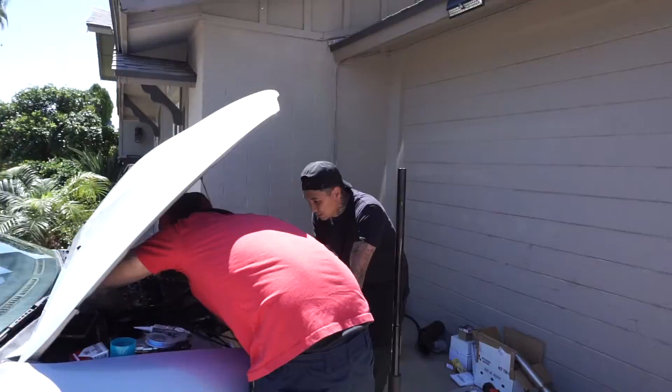Alrighty guys, we showed up. Got the boys working here. What up, what up, Kevin Triple G.

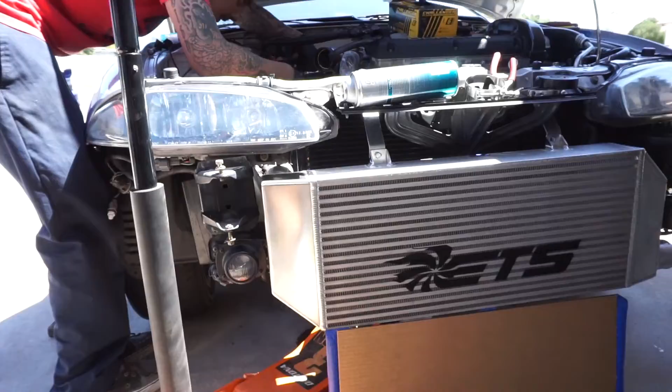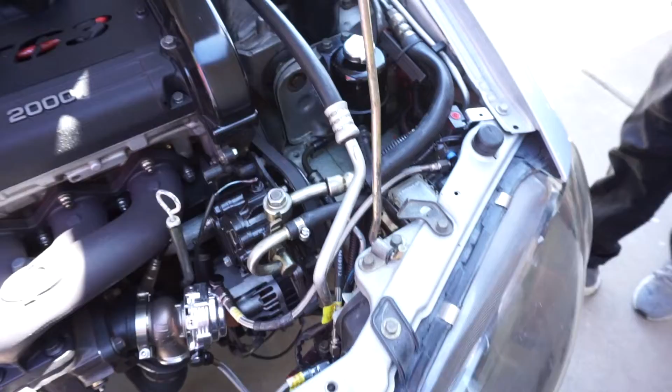Alright bro, let me see your intercooler. Check out the mean intercooler you got, damn, hella clean. He's also doing an electronic boost controller, so here's his solenoid. He did all the steel braided lines for the wastegate, and right now they're throwing on some couplers for the intercooler piping.

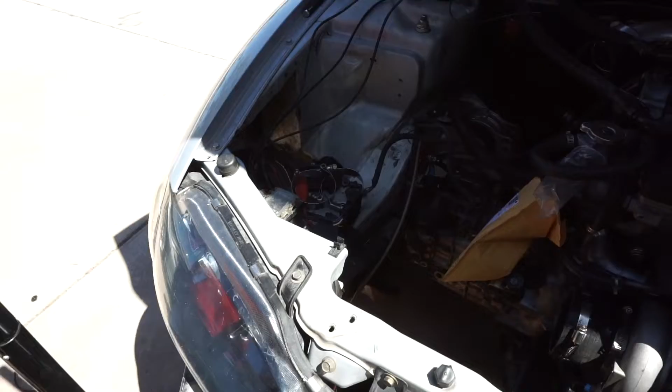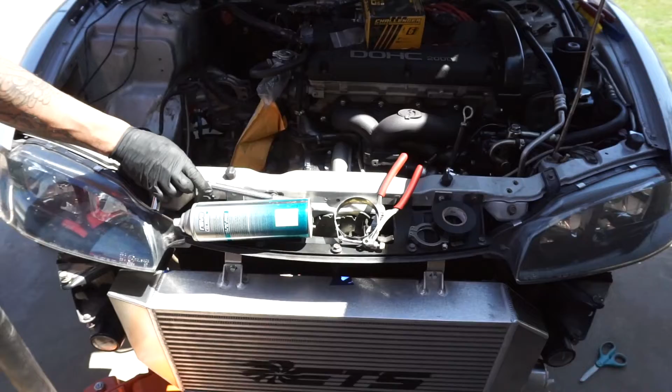And you're also doing your flex fuel, it's gonna go all the way down here. He's gonna be doing flex fuel and all that stuff because he's trying to also get tuned on Tuesday. 700 horsepower coming soon, and then a sick intercooler pipe.

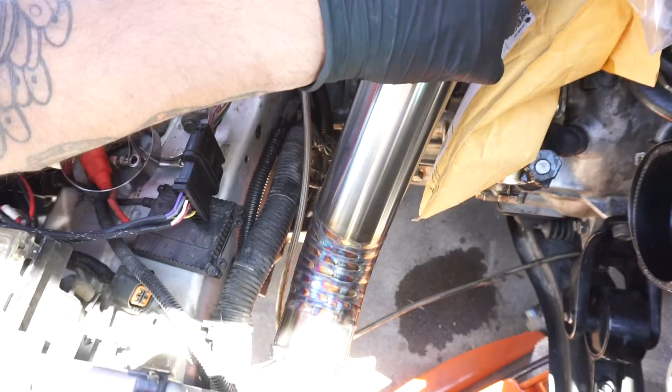Fresh boy, oh yeah, it's perfect, yeah. Money. How much have you spent, bro, so far? Don't even know man, don't even ask.

Alrighty guys, so I left my buddy's house where we were just chilling and talking. I didn't record much, just that little clip you saw. But I'm currently on my way to the tuner's house, almost at his place, I'll catch you guys when I'm there.

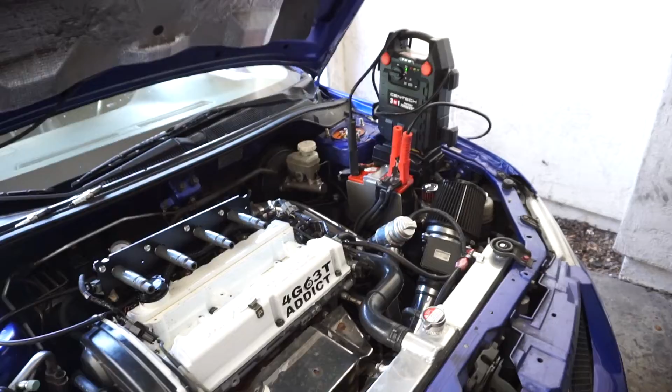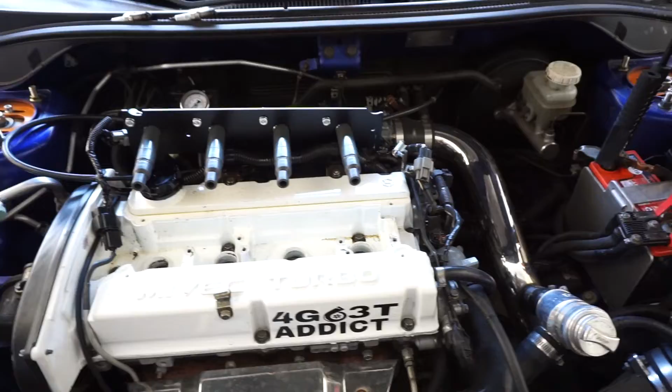Alrighty, so we pulled up to Anthony's crib. Big shout out, man, what's up, helping me out, hooking it up. So he's checking everything, went ahead and checked my pistons, making sure everything's good for the day of the tune so everything flows right. Right now he's loading my tune to make sure everything's set up, it probably doesn't look right yet, but he's gonna work his magic and hook it up.

Alrighty guys, what is going on, it's currently a week since I was at my tuner's house. Today is official tune day, so I'm at the gas station. I'm gonna go ahead and pick up some E85, E85 is what we have here in Arizona, so we can start the tune at his house.

So yeah guys, I'm right here, gonna throw some E85 in the jug, and then we'll be heading to his house. Man, I'm excited and nervous at the same time, always get nervous with these things, but it has to be done and I want to see this thing make some power. I'm gonna go do that real quick and catch you guys in a little bit.

Alrighty guys, got my juggy right here, filled up with some E85. That's just to get us started, then we'll make it to a gas station so we can fill her up, but this should get us going for now. Well, here we go. Wish me luck guys, I'll be there in a little bit, I'll see you guys when I pull up.

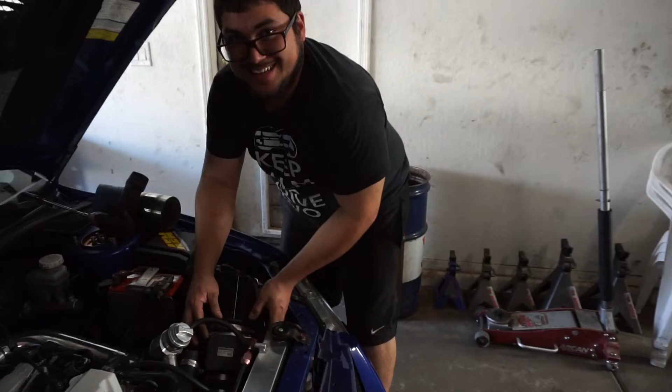So I've made it to my destination. What's up bro, here's the man himself. Him and Mr. J.A. Tuner are gonna give it the sauce so it finally runs good.

Right now we're gonna go ahead and switch out my injectors. We're gonna take off and do a speed density intake, so he's pulling off my intake and we're gonna use that one. You're at a 3-inch intake now and your turbo's a 4-inch inlet, so this will give it all the air now. So we're gonna do that, change the injectors, and I'll keep you guys posted.

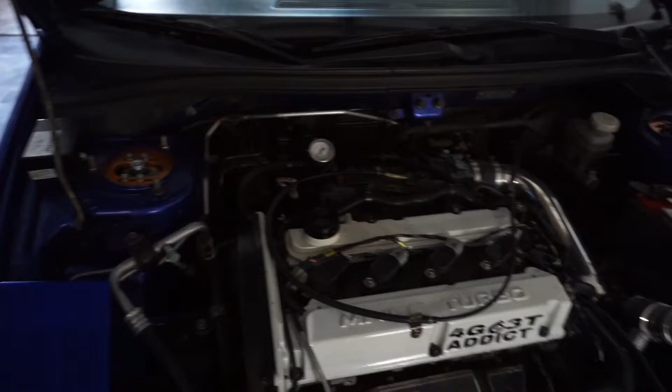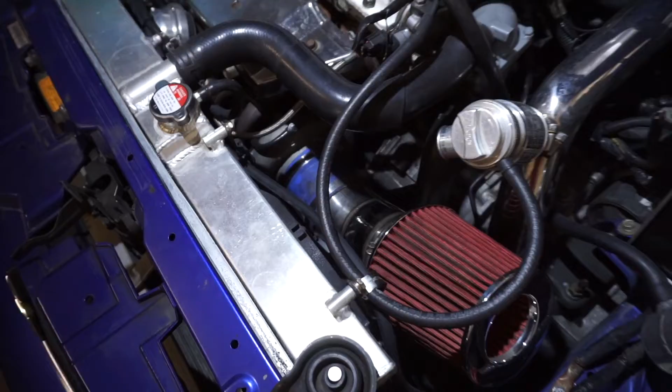Alrighty, see if you guys can hear me. New injectors are in, the intake's on, we got the blow-off valve vented. So right now we're gonna go ahead and set my TPS so we'll be ready to tip. We're gonna do that real quick, and then I'll catch you guys when we're on the road.

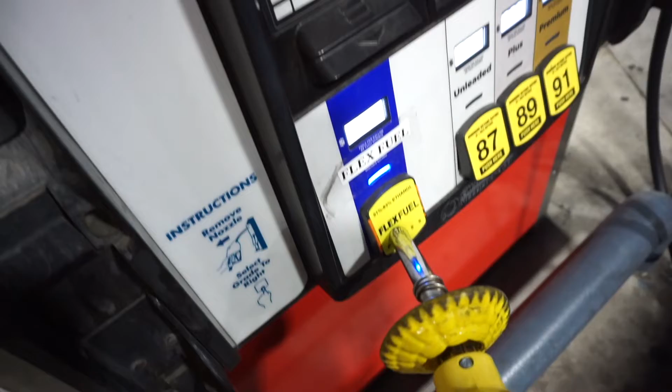Alright guys, this is the first fill up on this, kind of on E, so still getting everything dialed in. Here we go, let's do this. I'm excited guys.

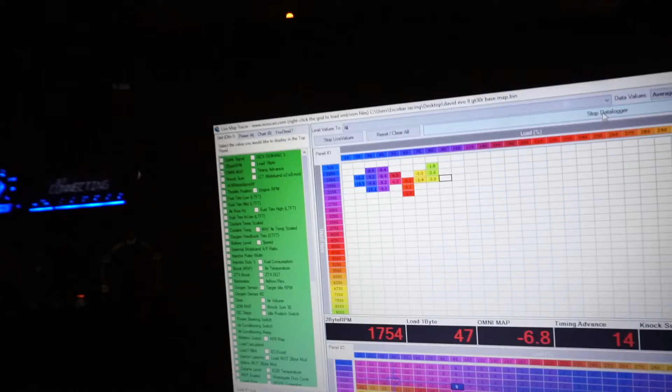Alright guys, a little bit more boost. We were on 15 pounds at the last pull. We're gonna see what it does now.

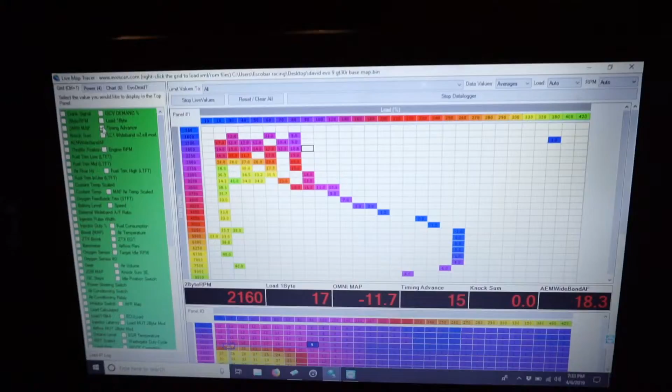On scale up to 11.3, 11.4 to redline. We're doing this till we get it pretty close, engaged, then we'll go to third gear once we get second gear. Alright guys, down, another second gear pull.

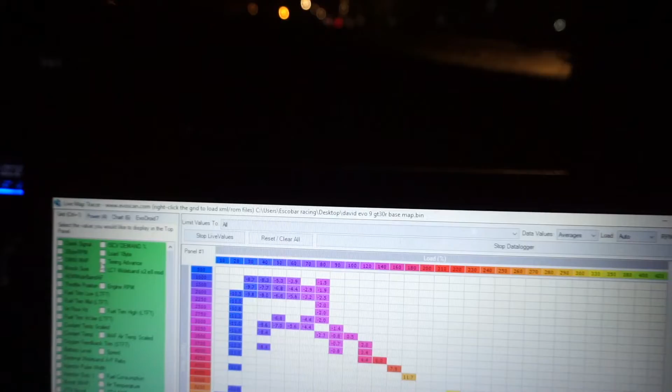Number 4. That one felt a lot stronger. Yeah, that's a little bit of timing and a little more boost.

Number 5. That was 29 pounds.

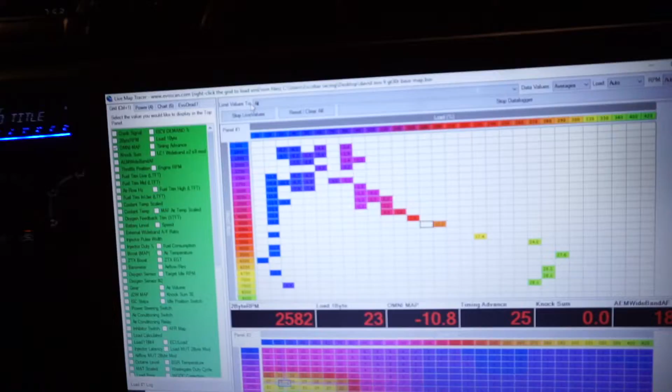Stop on boost. Alright guys, so now we're gonna do our first third gear pull. We've been doing second gear pulls, so now it's our third gear pull.

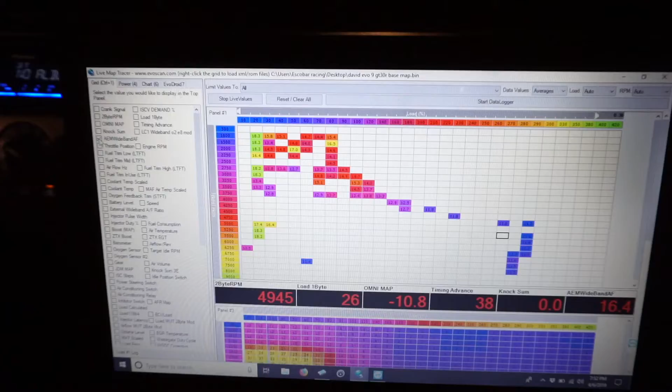Definitely pulls way harder than what it was. Now you got real fuel in it. Yeah bro, that's still low timing. Like I said, we just work our way up with boost.

Alright, here we go guys, another third gear pull. Second, third gear pull. This shit feels good though. I tell you guys, it feels way better than what it was.

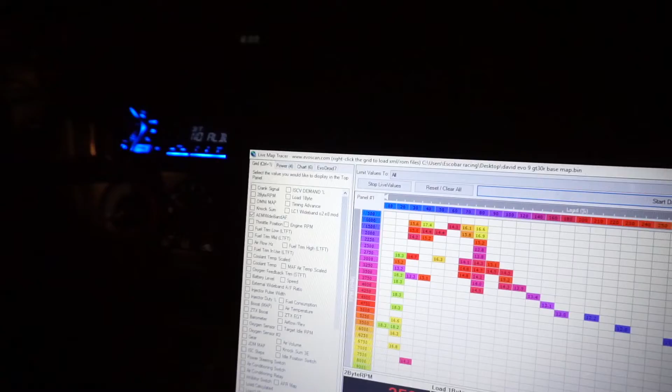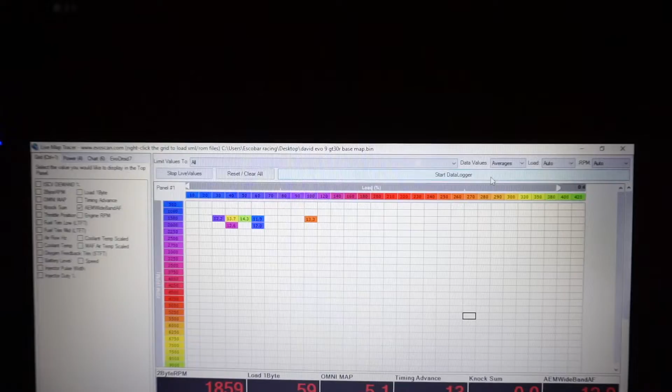He's convincing me to go with cams and valve springs. With cams and valve springs, we'll gain another 1,000 RPM in the rev limiter, and we can run more boost since it won't valve float since it's not gonna have stock valve springs. So I think that's what's gonna be next - get some cams, some valve springs, get a better clutch, and what else.

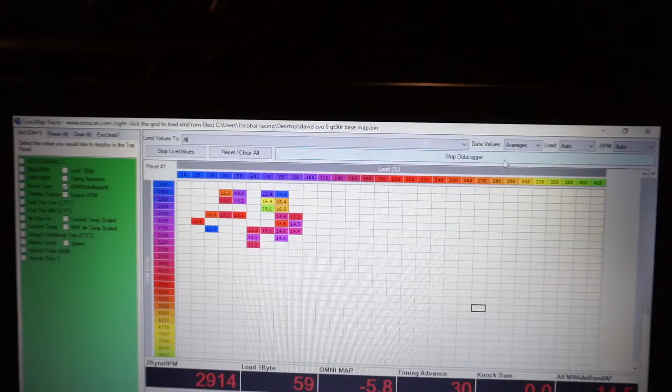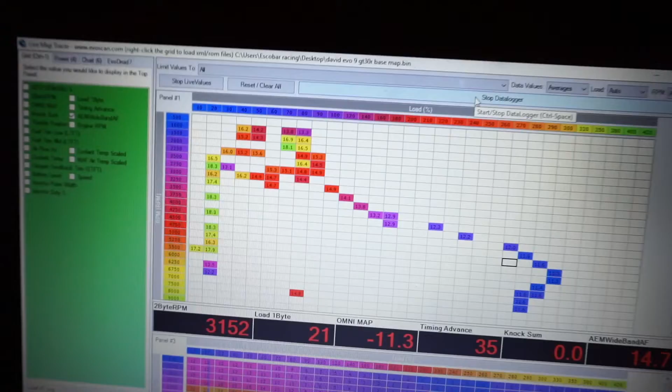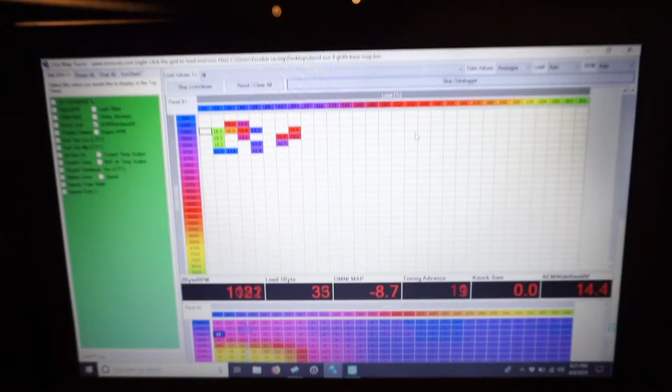It's just the third gear pull. Now we're gonna do a second and third.

And we're gonna test no lift shift since he doesn't know about that yet. He's gonna test the no lift shift.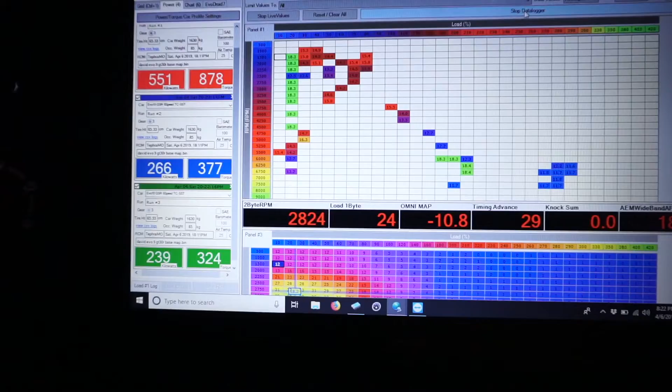Shit's sick bro, damn. I don't know if you noticed before, like when you shift it'd kind of jerk between gears. Oh yeah, you have to let out. Now you don't - it'll hold boost between gears better and it'll let you shift faster. Shit's sick. Only thing is, like you said, you're gonna have to upgrade your clutch.

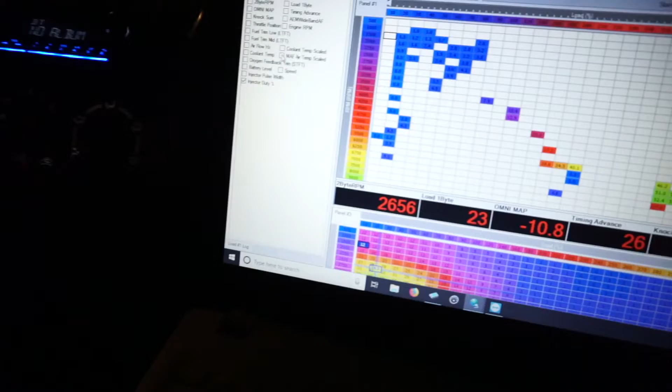So now we're checking launch control. Let's hear it. Nah bro, it's loud though.

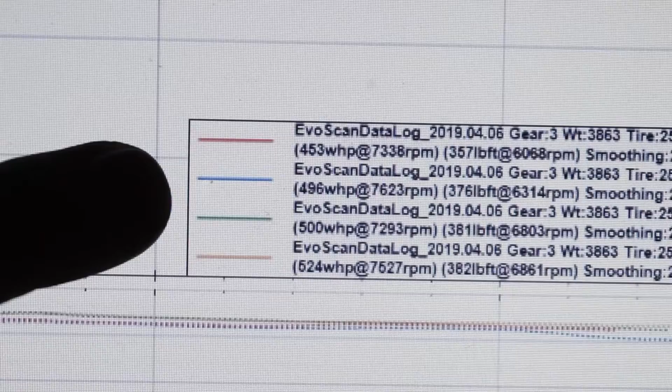There we go. Alright guys, so these are some numbers. He's gonna explain to us real quick what it is. So when we start doing third gear pulls, we start saving the logs and doing power pulls.

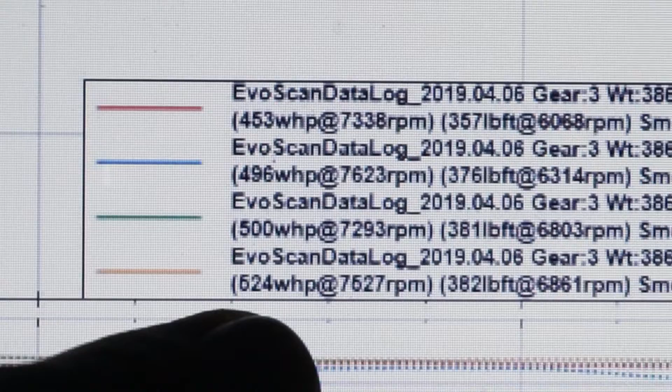This was where we started on our first third gear pull, and this is where we ended. So it goes in order of the pulls we did. We ended at 524 horsepower and 382 foot-pounds of torque, I think. I couldn't be happier. That's fucking sick, it feels fucking good.

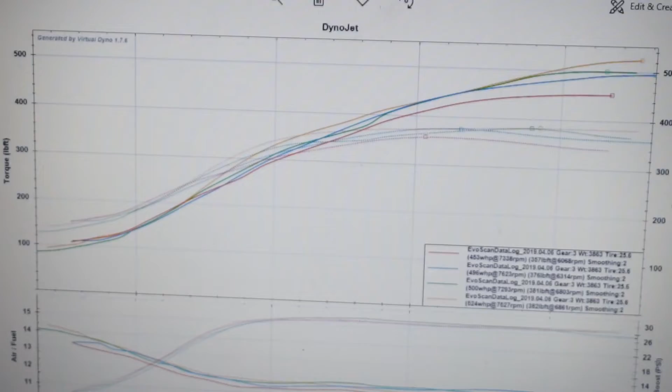Look at the AFR curve, how flat it is. Is it this one? Flat. This is the AFR curve here. And then your boost curve, super flat too. So that's pretty good. Hell yeah.

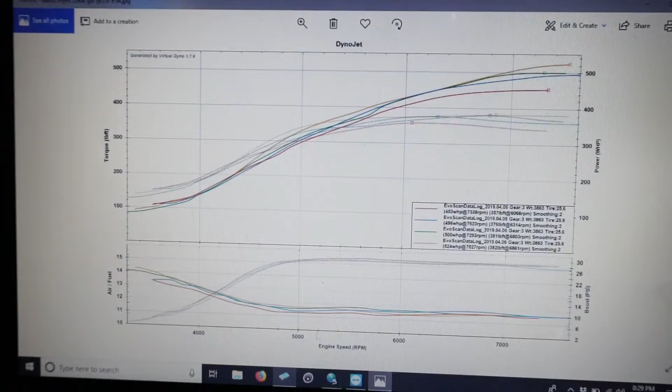He was playing with me and told me I only made 460, and I was like, shit. I was bullshitting him, I'm like no way. And then he pulls this up, so fuck yeah, I'm excited. Big shout out.

Alright guys, it is currently the next day. Yesterday when I got home after the tune, my camera died, so I just got home and called it a night. But yeah guys, the Evo made it home safe.

She's good and she's running hella strong. I'm really happy with the results of what she made. It was 524 horsepower and 382 torque, I believe.

I want to give a big thanks to jatuned for giving the Evo the sauce. It's like a complete different car. This morning I went to the store and it's just a complete different car, like it feels nothing like it was. And the E does make a big difference, it just drives awesome.

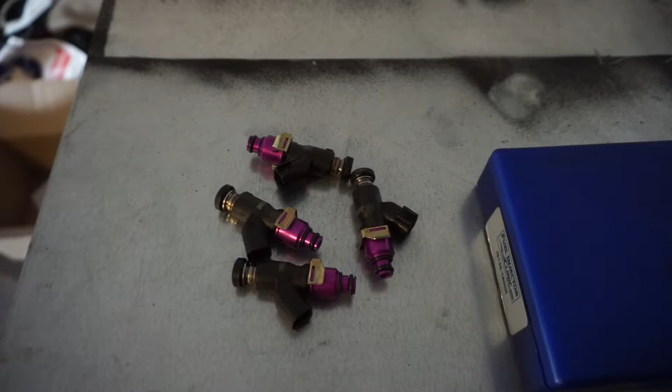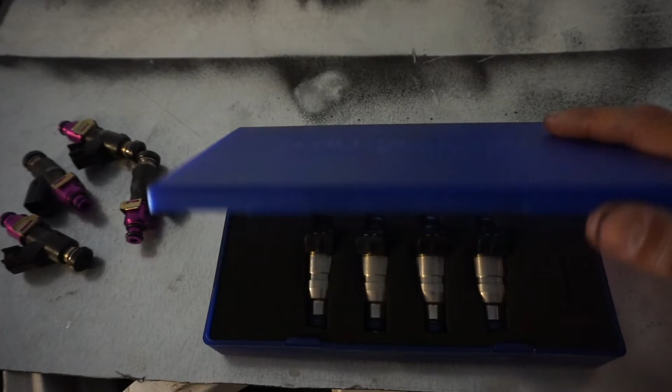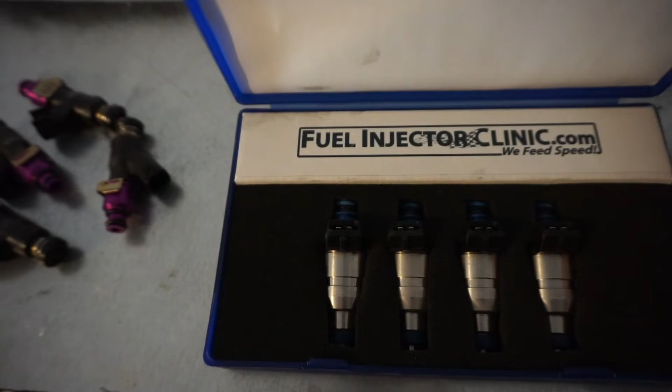Alright guys, this is what I wanted to show you. So as you know, I was on these 1000cc injectors that I broke my car in with, and when I was gonna get tuned, I was gonna switch to these 1800s I purchased from Map Performance. These are 1800 low impedance injectors, so the whole plan was to switch from these to these for the tune. When we decided to switch to these injectors, brand new straight out the box, I slapped them on and the car started misfiring. So we're like, well, what the heck? We started going through everything.

We started checking plugs, checking spark, making sure my coils were firing right. We checked to make sure the plug to my injector was getting power and all that stuff, and it turned out to be a faulty injector. One injector was not working, not spraying, and it was causing my car to misfire. That really sucks because these are brand new, I purchased them literally straight from the box onto my car and they didn't work. So I'm gonna contact them and see what they can do for me. But we ended up figuring it out, we got another set of injectors and made it work. That really sucks, but like I was telling you guys, the car runs awesome.

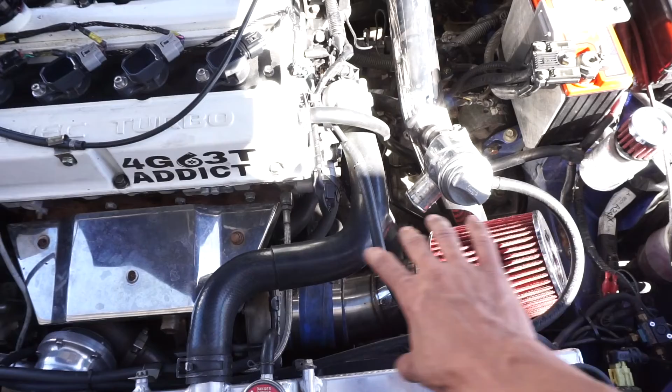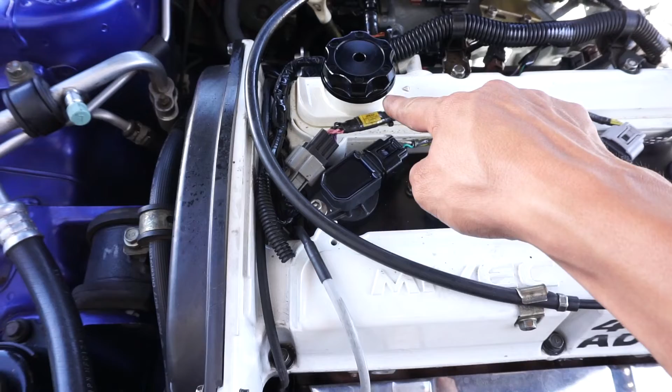Let me show you some of the things we changed. I no longer have my MAF, now I have an intake. My blow-off valve is vented to the air. We have the whole speed density sensor now, and that's pretty much it. Just no more MAF, you no longer have the big old MAF right here, and my blow-off valve is vented. So that's pretty cool. And we're on E now. Also had to change the seal on my oil cap because every time it goes into boost it's spraying. So yeah guys, I'm happy with the turnout and the results, and that's all that matters. I'm just gonna go clean up my bay a little bit, clean up the wiring on the engine bay and the Evo, and then we should be good.

That's gonna be the end for this video guys. Hopefully you enjoyed the little clips of the pulls that I got. I didn't get to record too much because we were just trying to get the injectors to work and this and that, but hopefully you guys enjoyed it.

Stay tuned for the video for the DSM coming out shortly. Also, parts are starting to stack up for this 2G we have outside. Pistons are here, so now we can get rolling. Stay tuned for that, guys. We have a bunch of stuff coming up with my 1G, the 2G that's outside, and this 2G that needs to be finished. I have another Evo that I have to do a couple maintenance things on, like water pump and timing belt. But stay tuned guys, I hope you guys have a good one.